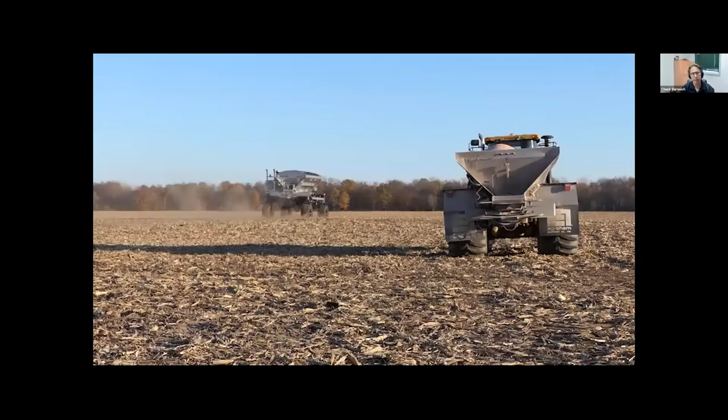And then this is just a short video clip. I apologize for any choppiness of the video. That just shows the two of them operating together. Again, thanks Ian for videotaping that. It was quite exciting. I believe it's one of the first times this has ever been done.

We've had the OmniDrive on two different tractors this fall. We had it on a demo tractor initially, and then we moved it to this tractor later on. You can see on the screen, using the laser pointer, that we're using Raven RTK to integrate with the tractor. It has cameras mounted here. You can't see the radar on the front, but there are cameras on all four sides for safety and perception.

And my brother has been the one running it, and he... let's try to get rid of this laser pointer now.

He did take a small video with his phone of himself. It's a little bit choppy, but there's no driver in the cab of that tractor. He finished the pass, and now he's just watching it as he sent the tractor off to the unload zone at the edge of the field. So the tractor is moving all on its own.

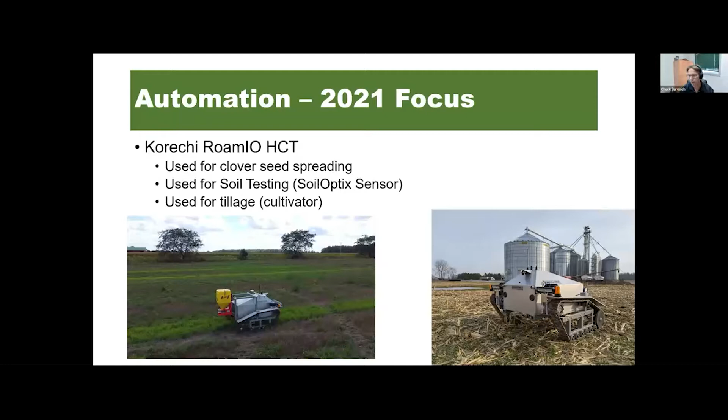Moving into the next phase, early in the spring, we formed, along with OMAFRA and University of Guelph researchers and Ontario Grower Boards, an autonomous working group together so we could coordinate our efforts, so we didn't have a bunch of different organizations and people all doing the same things. We wanted to coordinate this somehow.

As the season progressed, we expanded the group to include equipment manufacturers as well. We meet weekly, and the working group helps us determine our research needs, organize cooperative plots, and coordinate field demonstrations. We started this process back in February, and again we wanted a coordinated approach. So we reached out to OMAFRA, who has helped lead this process with us. We've been very appreciative of their help.

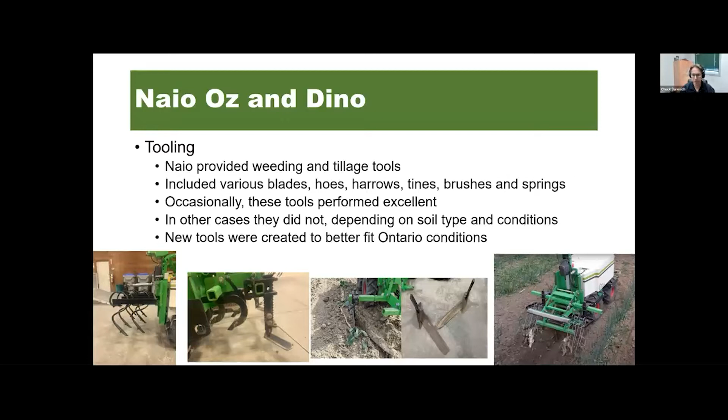Some tools were not successful at breaking up the soil adequately, while others, like these harrows, performed very, very well. We found large amounts of crop residue were a challenge, and soil type and compaction influenced the type of tool needed—on nice light sand you don't need very much, but on the muck soils at the Holland Marsh, it was very challenging.

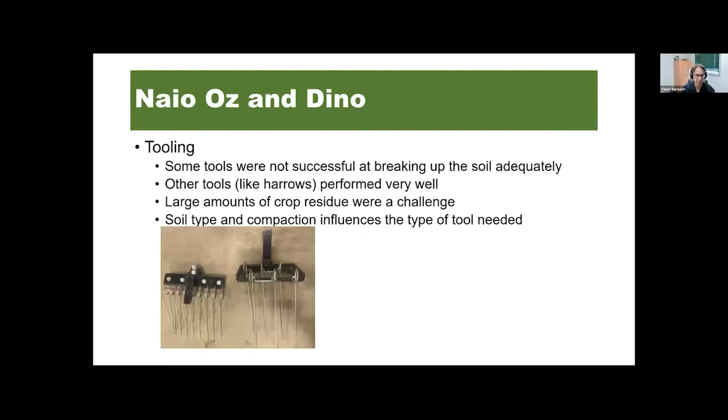The tooling can be adjusted to accommodate almost any row configuration, either through tire alignment or tool configuration. The tools are designed to be very flexible on heights and widths and whatever's needed, so that was nice to see.

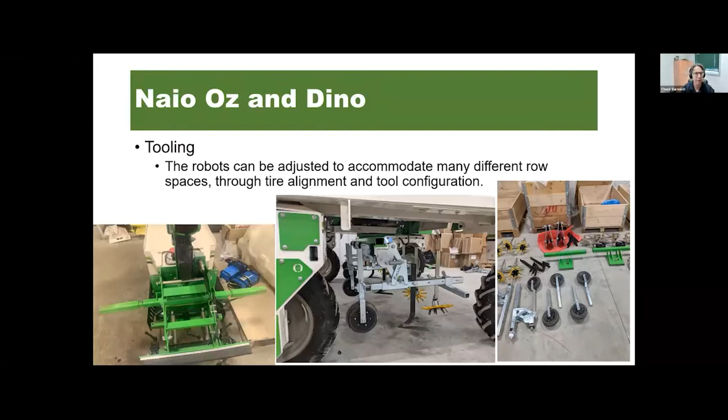We found that in highly compacted soil, the small tines were ineffective, and sometimes the larger blades left the soil too clumpy. So we found that larger, heavier tines worked the best.

Weed control with an autonomous weeder is the same as weed control with herbicides. You need to do it when the weeds are small, because large weed roots will plug up the weeding tools. So the same rules apply.

We also found that excessive depth of the tool can cause the robots to go off course. Naio has since developed an additional weight kit to help with that. And obviously, this is a no-brainer - uniform soil conditions are ideal.

Nothing new there. The Oz robots were very simple to use, very straightforward to understand. And the RTK GPS was generally good enough to keep the robots away from the crop. We did find that a poor map led to poor results.

As you can see in this image, if you went over a rock or a tree stump or something and went off course when mapping the robot, it will come and map that row off course every single time, as you can see on the line on the left, and it will not correct itself. So a good map was key.

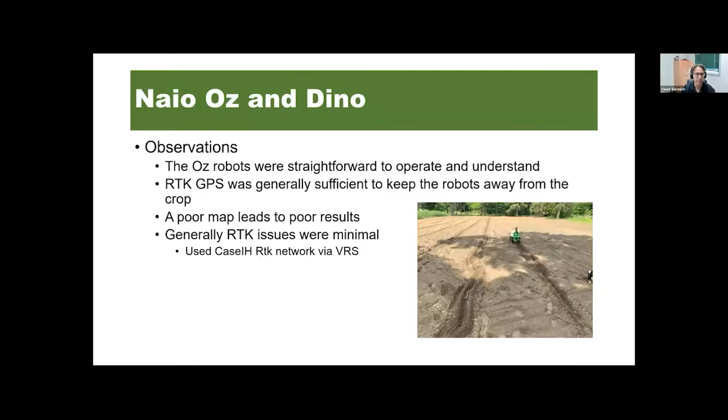The robots have very little issues with wet conditions because they're so light - they don't sink in. Because of that, they would go in conditions where you would never think of bringing a tractor in the field. And so long as the soil surface was dry enough, since you're only touching the top centimeter, we had no issues with the tooling as well.

The robots could handle most ruts without tipping over, which is also nice to see. There is an option on the robots to have dual tires and extra weight, which help improve the tracking in tougher conditions, to get the robots to keep driving straight. Obviously, it improves the stability of the robot.

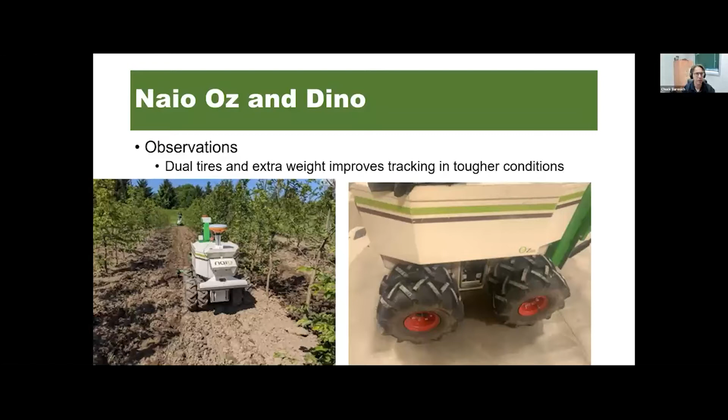To get the weeds that are in the rows, sometimes multiple passes were needed. Between the rows, weed control was very, very easy to accomplish. And we used side tines, which don't show up that well in this picture, but you can just see them.

You can just kind of see them right here. These little soft tines would get closer to the plant. And when the stalks of the plant were heavy enough, we could actually get the weeds in between the rows. The weeds do need to be small - that is an issue.

On the Dino robot, it's a little bit different - it uses a camera to look down the row. So the Dino robot uses RTK GPS to keep the robot going, to keep the tires in the right place, but then it uses a camera to keep the tool carrier lined up to the row. It also has the ability to go between the plants if the plants are far enough apart. So it is a more advanced robot designed for different crops.

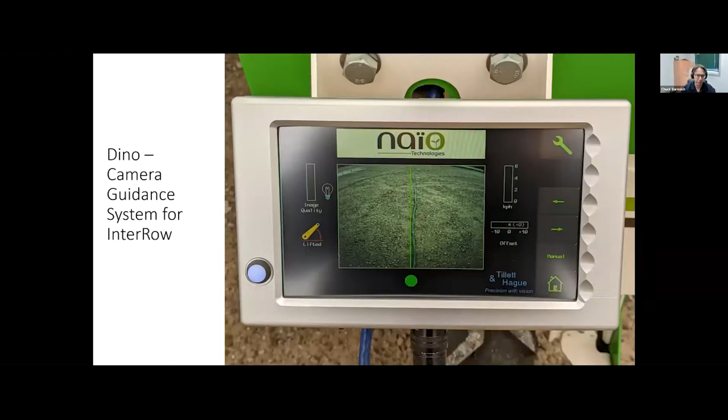So crop growth patterns matter. One of our observations was that spreading crops such as tomatoes and cole crops have a limited weeding window.

You can insert leaf guards on the front of the tires for both the Dino and the Oz robots that push the leaves away. These were very effective to allow the weeding to continue for a longer period of time. But there is a limit to what you can do with a spreading crop.

Also, these machines have a good fit on nursery and berry farms, especially because the rows don't move - they don't change from year to year. So we were actually quite impressed with how these robots worked in these situations.

So again, overall, our 2021 observation is that they provided impressive weed control. They certainly exceeded our expectations, especially because we were new at the process.

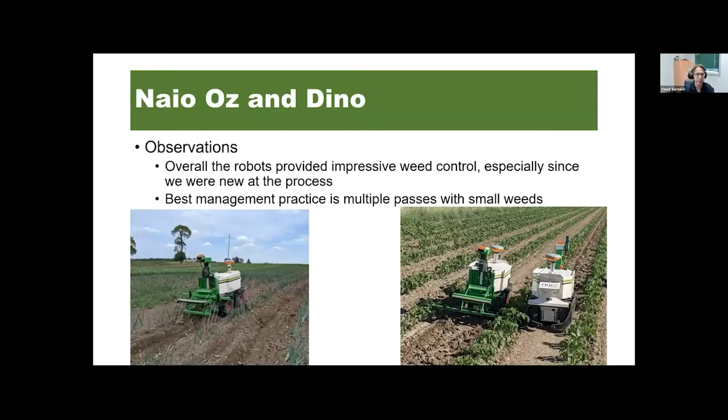A best management practice is multiple passes with small weeds. One thing I observed talking with farmers is that cultivation and weed control was generally done as sparingly as possible, largely due to lack of labor. If you're bringing in a weeding crew or running a cultivator through the field, people would only run through as often as they had to, and sometimes the weeds would get a little too big. But with an autonomous robot, you can increase the number of cycles because you're not under a time constraint. You can let the robots go in when the weeds are microscopic or very small, and that performed best because you're essentially just brushing the surface with multiple passes.

In this picture, on the left-hand side you can see several things. When this field was mapped out, there was a rock in the field, and it was interesting to see how the robot followed around the rock. On the left-hand side, when we came to weed, we purposely left it a little too long, so there was about 50% weed cover in this row of crop. After one pass of the Oz robot, we were down to 23% weed cover. After two passes, we were down to 2% weed cover. This was a very eye-opening test for us, and we were quite excited about how it worked.

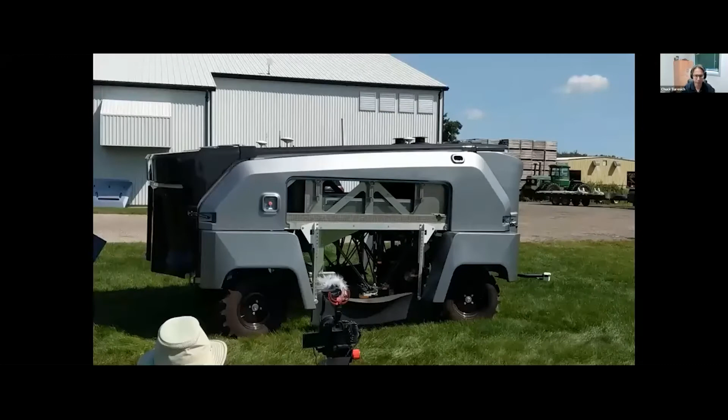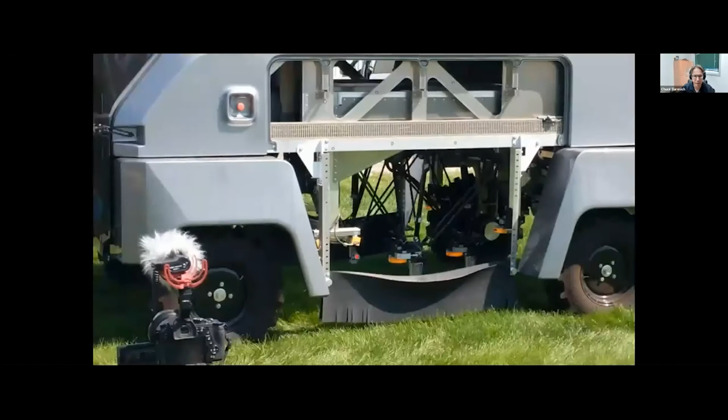The next robot is an answer to the question for spreading crops: what's the solution if cultivation doesn't work? The answer is you need a crop with fingers, or a weeder with fingers or arms. The Nexus robot, originally designed in Nova Scotia and now based in Montreal, uses a set of mechanical fingers to reach in between the crop and pull weeds out. They played a small demonstration of the Delta arms reaching in, so I'll try to pause the video here so you can see the little fingers reaching in.

As the robot goes across the field very slowly, it identifies what is not a plant, since it's trained to recognize the crop in the field. So if you tell it it's doing carrots, it can see the carrot, or whatever crop it happens to be, lettuce or cabbage. The Delta arms recognize what is a weed, reach around the plant, grab the weed, pluck it out, move it to the center of the row, and drop it on the soil surface there. That is the goal of the Nexus robot, so it has its place with spreading crops.

That's what we did in 2021. In 2022, our working group is busy planning for next year. The Oz and Dino robots are offered for sale or lease for those interested. We'll still be doing demonstrations across Ontario as much as we can, along with the Romeo and Raven products. We are formalizing the use of the robots with farmer cooperators, moving beyond a demonstration piece. We're satisfied the robots will work and be commercially viable, so now we're moving into where these robots will fit on a commercial scale. That's our plan for 2022.